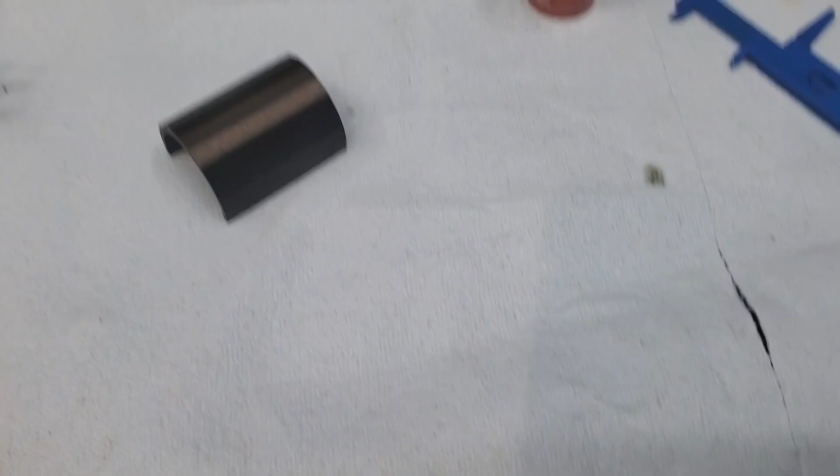I'm not going to start this off by saying okay, but okay, here we go.

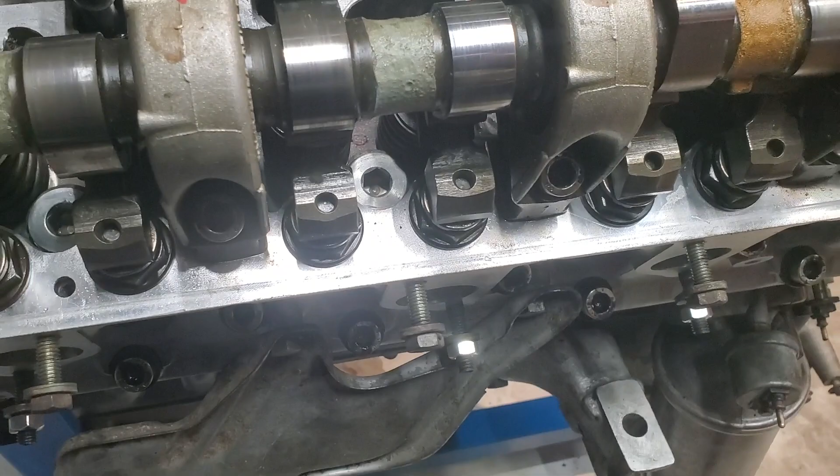Okay, so the compensating elements on a 380 SL 116 engine, you can see them here. These compensating elements are still deflated, mind you, meaning we took all the oil out of them at the machine shop when I had the heads redone. So right now they're going to be compressed more than they are.

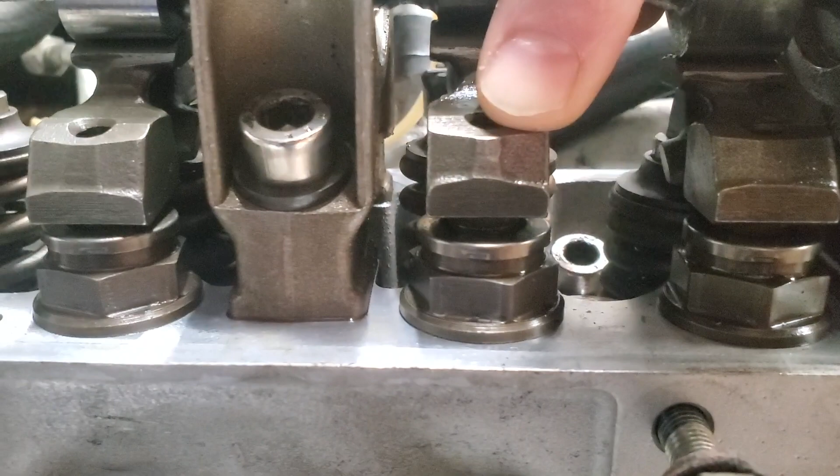But what the factory specs require, I'll see if you can see this on video here with my thumb, is that there's some play on the actual compensating elements. These things move about 2 millimeters, I'd say, easy. And they have to have some compression on them. So the valve, as it sits in the seat, has to push up.

Here's the shims in the back. I'll get that over here. You see right back there, you can see the shim that this rocker sits in. And that shim sits inside on the top of the valve. Now these shims come in varying heights.

Now the way to determine if it's the right height or not is that you have to measure how much this valve pushes against this rocker and deflects itself down to push the compensating element down. Now they can't be bottomed out and they can't be fully lifted up to the top. There has to be a set play. So what I did is I went to the 3D printer and I printed off this piece because I'm cheap and I didn't want to buy the $110 tool.

And I looked online, and there's a measurement that the actual height of the compensating element should be around 29.67 millimeters tall. So what I've done with this is, it's not the exact same spec, but what we have here is, trying to do this with one hand, 45 millimeters of height.

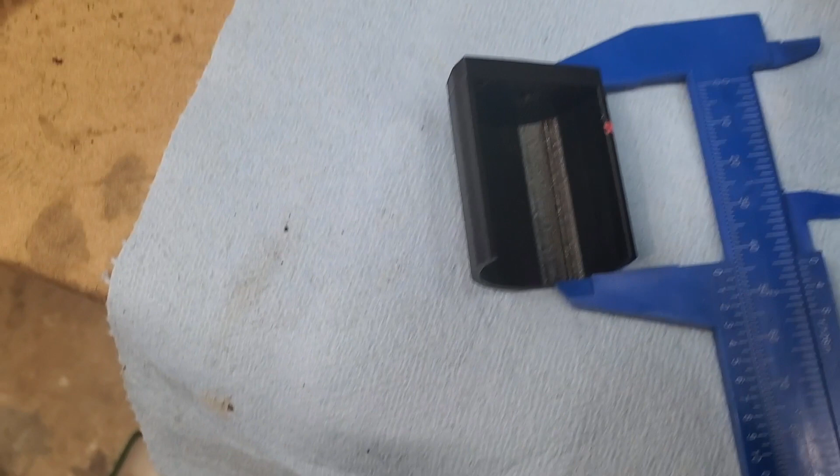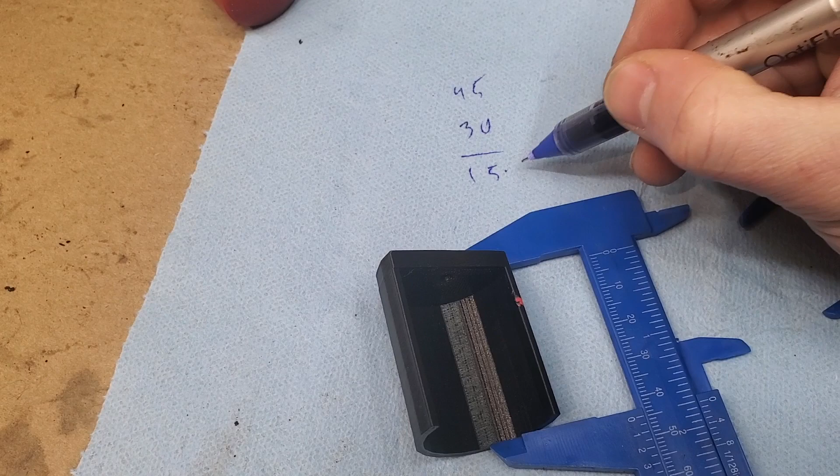Now obviously if we have our 45 millimeters and we take away our 30, we have 15 left, easy math. And at that 15 height, that means it's at the maximum tolerance. Now it allows a 1.2 allowance, so I guess I could go from 15 down to 13.8. Big with the math here today.

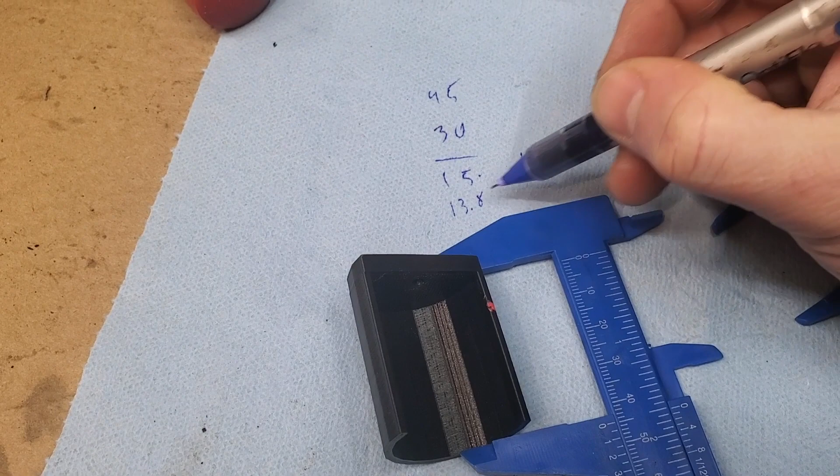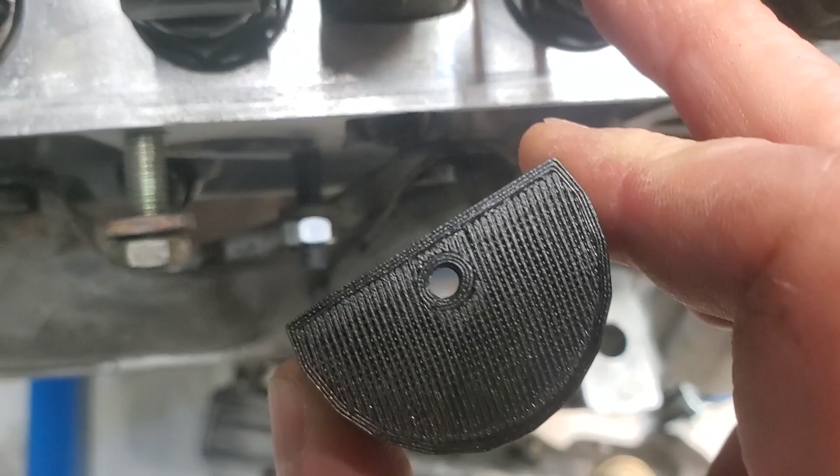So what you can do now is that I made it with a hole in the top. So this piece will fit right over top of the compensating element. You can see everything lines up. You can see the top of the compensating element through the hole right here. Put it on, levels it off. What can we do? We can measure it.

Let me just show you this. I hate working with one hand. I need to become a real YouTuber.

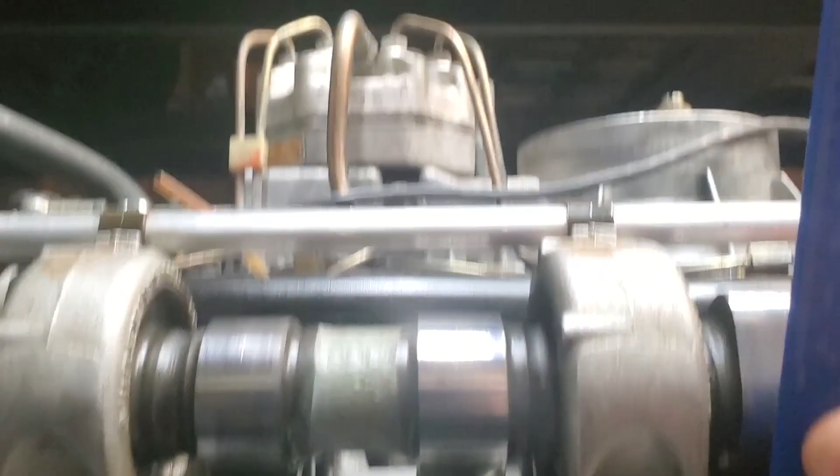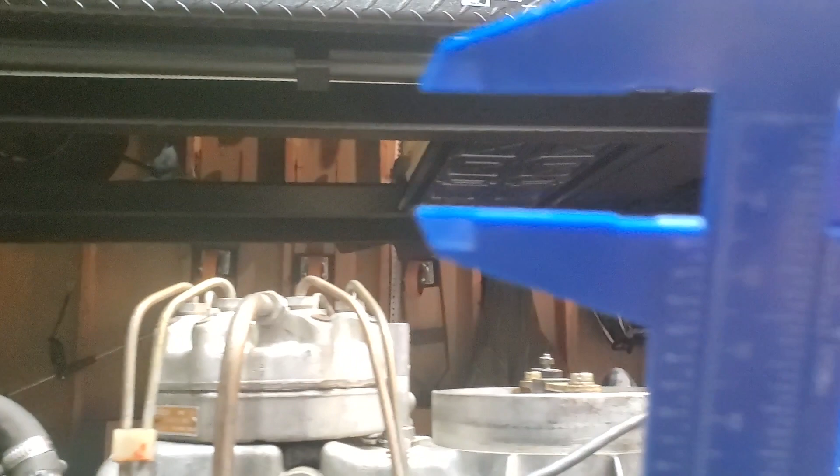So what is this at? Now mind you, this is not loaded. The lobe of the cam on this is all the way up. You can see it over here on the top lobe. So that's the way it's supposed to be. And then you can see that the measurement now is going 16 millimeters.

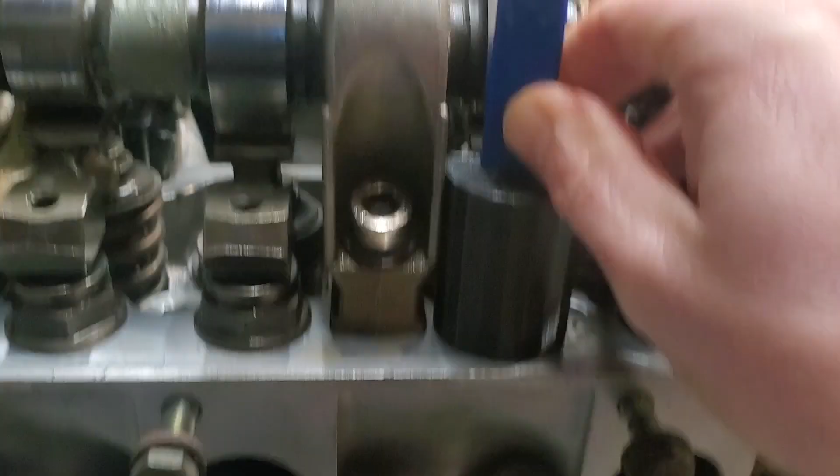So that's within spec. Now this measurement doesn't mean anything right now because I have to crank the engine without fuel to prime those compensating elements, and they're going to give some resistance. So the measurements are going to change, but this is how I'm going to figure out what I need. So if anybody needs this tool or the design, it just took me a couple of minutes to make. I based it off the plans, but this is going to work. So this is how we're going to measure each one of our compensating elements, and then we'll be good to go.

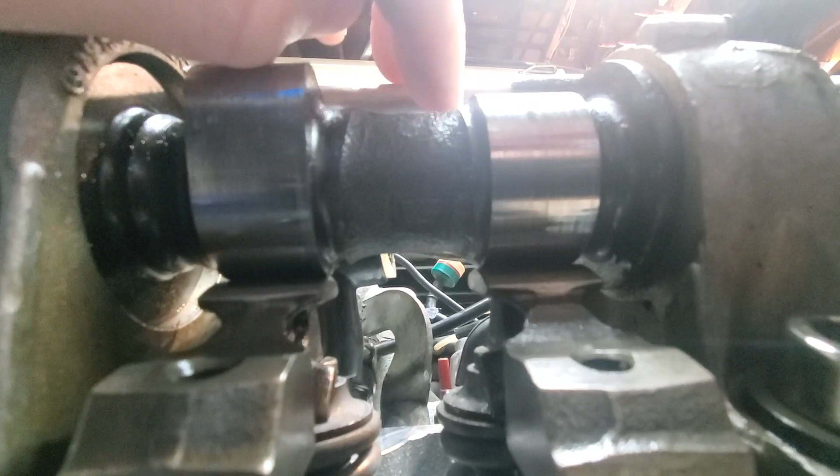What else can I show you? I think that's pretty much it. So we got the rails in. These clips, I did it while it was warm. These rails slide in, and they only slide in one way. There's little holes on the bottom. I don't know if you can see that there. That little hole there will grease this journal and so on.

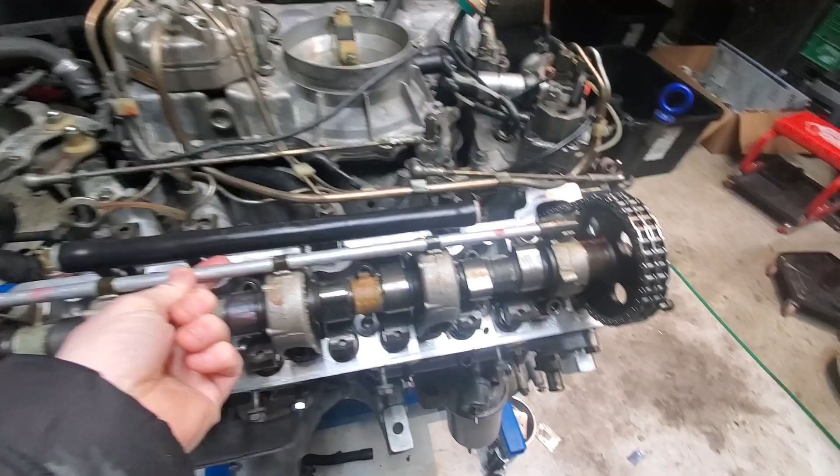And then they have the little clips. These clips are really easy to do if you ever have to do them. They're in here snug right now. You had to hammer them in with a rubber mallet pretty good. I made sure that everything's seated. But online you can see people talking about these clips getting brittle and then letting go. And I think it would probably only be the case if you were touching this.

So the only time that you'd ever be doing this is if you had the heads off, if you're doing something with the timing, like if you're here already. They cost like $4 or something like that per side. You have to order 2 sets, and they just slide on. They only go on one way because there's a little lug eccentric inside the actual clip itself.

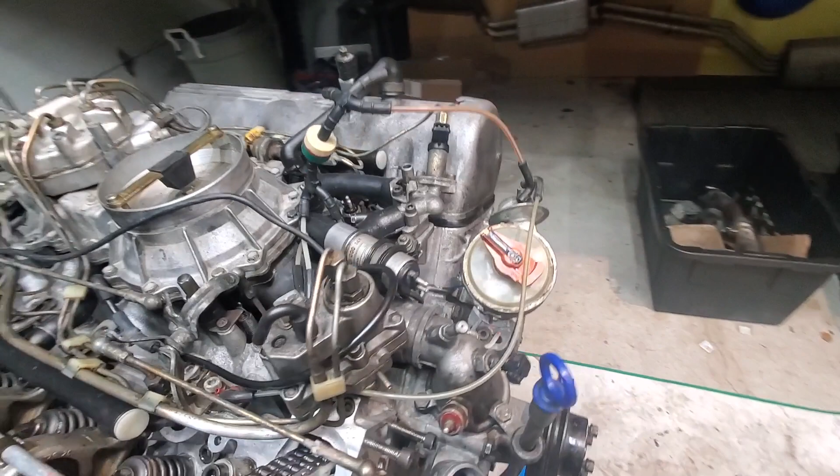So right now, I think we're at a really good spot. I went through the car itself. There's only a couple more things that I have to do. Here's the original valve cover. What happened? My timing chain snapped. Why did it snap? This guide, the inner guide, which is the exact same one as this one right here, let go. Caused slack in the chain, caused it to jump over.

Everything's lining up perfectly when I check my timing. I got my distributor set on number 1. I have to confirm that. Don't take that verbatim just yet. But that's going to be no problem because I've marked everything all the way through. So we're at the stage where we can finally start putting the engine in, and hopefully this thing fires up.

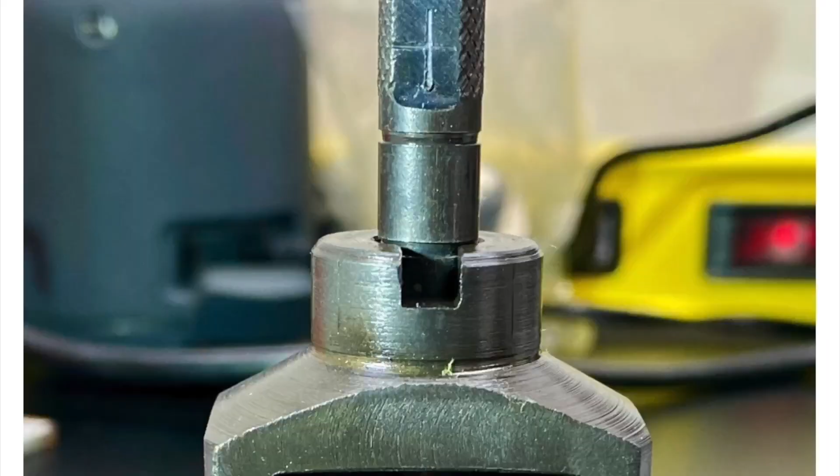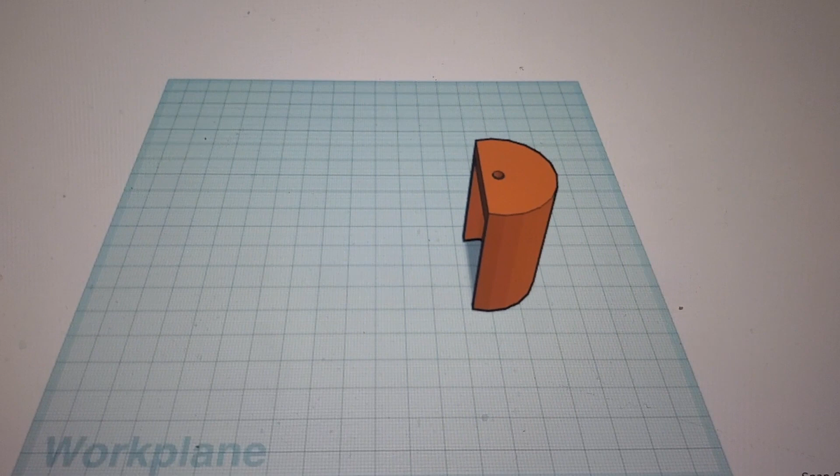Okay, so we're going to make the compensating tool with the 3D printer, Tinkercad. So we've copied the measurements online, and then what I'm going to do is just use the tailstock end of the caliper, the Vernier caliper, to measure from this hole all the way down.

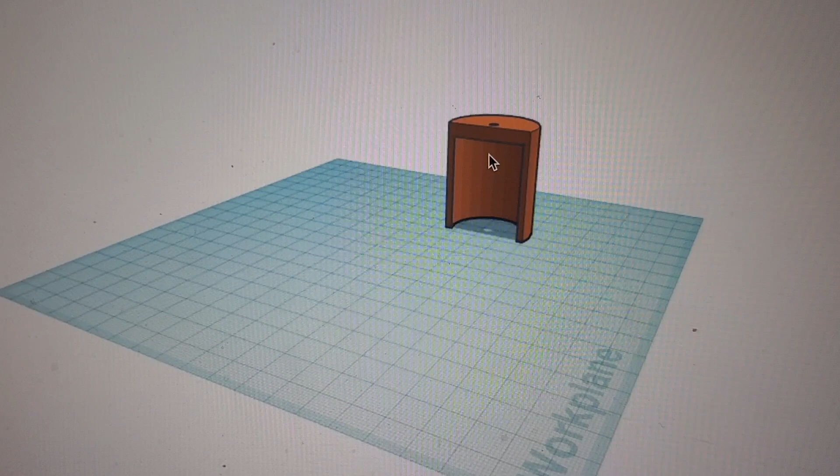I already know from online that the measurements that we have to have for the compensating elements are just under 30 millimeters. So I'm going to be able to measure from the baseline hole here all the way down, and I'll figure out what the 30 millimeters measurement has to be. This is my first drawing, so I'm just going to test this out first on the 3D printer, and we'll kind of see how this works out.